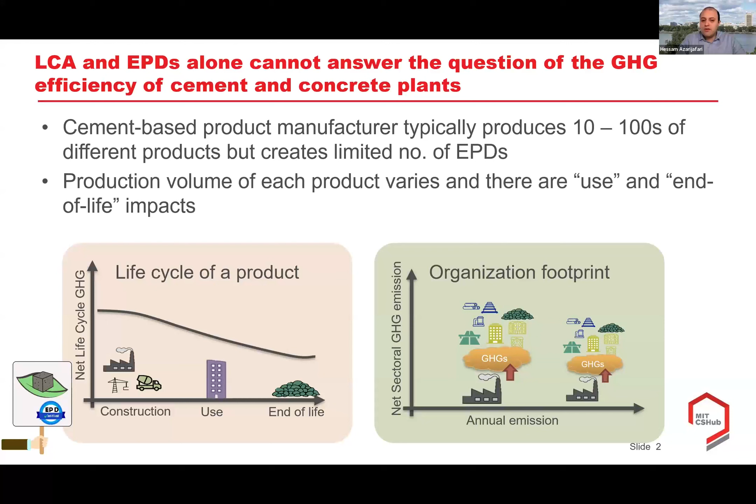So we need a more comprehensive framework to draw around the organizational footprint of a given facility that produces these materials.

But again, there are no clear guidelines on the rest of the emissions - the downstream emissions associated with use and end of life, as well as the upstream emissions associated with procurement of raw or intermediate materials for the cement plant.

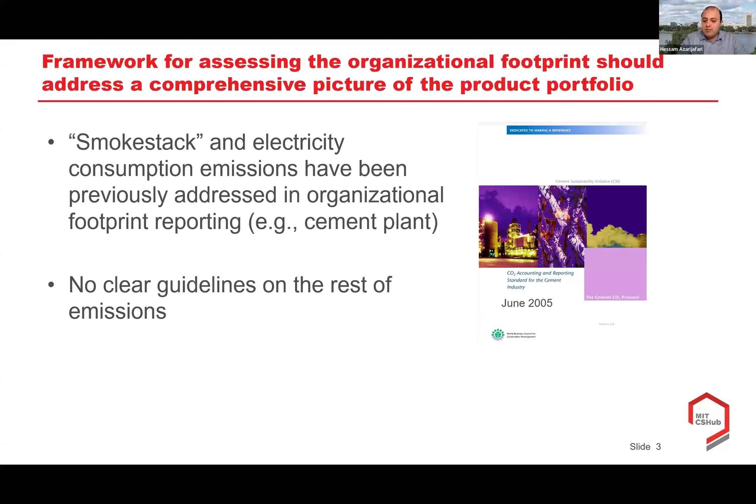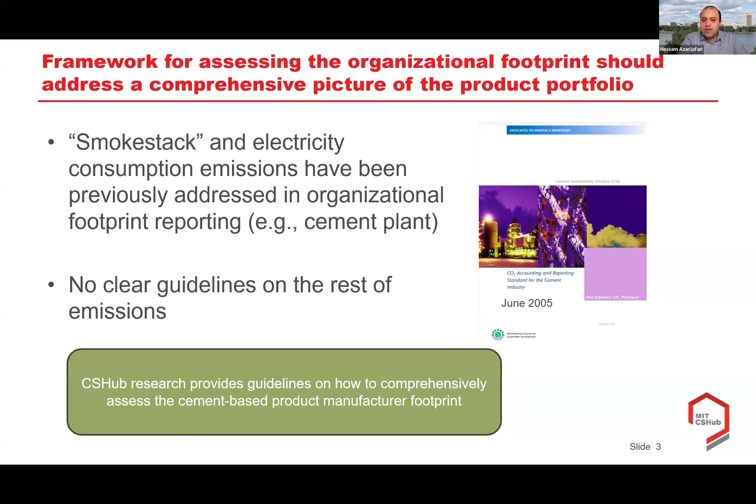Here, Bensu and Miao will provide guidelines on how to comprehensively assess the manufacturer footprint from an organizational perspective, accounting for all these important parts of product use as well.

The other part I wanted to emphasize is when we look at a facility looking to improve the performance of their product - producing a high performance product that gives a lower use phase impact - and I'm emphasizing expanding the facility. With expansion of their market and producing more of these materials, their footprint will go up.

But in reality, using these more efficient products results in a lower use phase or end use impact. If we want to show that, we'll see it doesn't show up in the scope 1, 2, 3 emissions. So there's a negative point here for the factory.

For example, the tire industry has already come up with guidelines on how to quantify the excess fuel emissions associated with tire performance during its use period.

But we'll see that if we only look at the limited scope of GHG reporting currently existing in the literature, we only have raw material procurement and manufacturing emissions. Perhaps distribution was added if downstream processes were included, but the use and the benefits provided to the user as a result of expanding the high performance product was generally neglected.

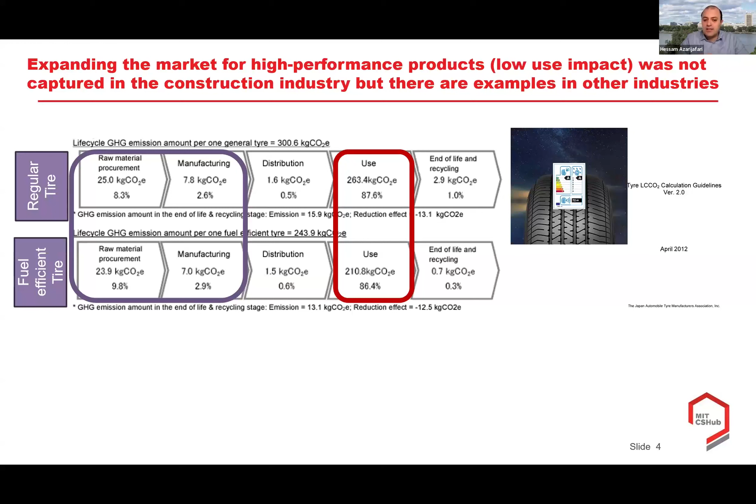Here we will show you how we can estimate the environmental benefits that an organization, for example a cement or concrete facility, can bring by producing a more efficient product in different end-use applications. So I'm going to stop here.

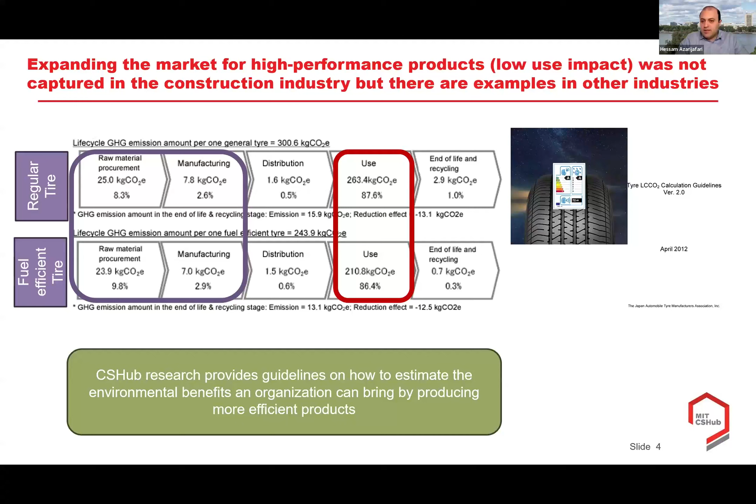Since we got a clarifying question about what an EPD is, let me explain: an EPD is usually a document that includes production, transportation, and installation emissions associated with a product like cement or concrete. It's often defined as including all life cycle emissions, but it's usually limited to the A1-A3 emissions.

As Hessam mentioned, my name is Bensu, and my colleague Miao Zhang and I are going to talk about opportunities for building and pavement life cycle assessment to inform cement scope 1, 2, 3 and avoided emissions reporting. If you guys need any further explanation about anything on the slides, feel free to add that into the Q&A, and I'll make sure to address it during my presentation.

This webinar will include two parts. In part one, I will first give an overview of cement's value chain, then present a map of building life cycle emissions and the portion of these emissions we've identified as reportable within cement greenhouse gas accounting and reporting. Then I will show a case study of scope 1, 2, 3 emissions in a US context.

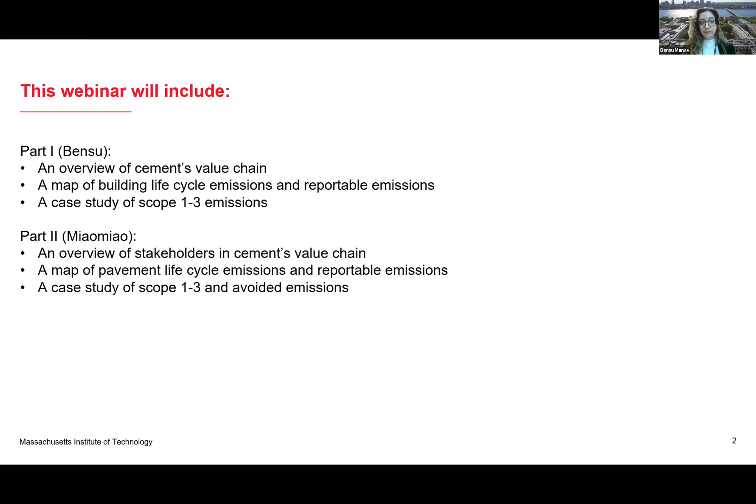I want to take a moment to talk about what we do at the Concrete Sustainability Hub. Our research is broadly collected under three main themes: carbon neutrality, infrastructure, and resilience. Details about our research, briefs, and papers can all be found on our website, cshub.mit.edu. The work we'll talk about today combines research from all three of these themes.

The part I'll present on building life cycle assessment includes work found under our resilience and carbon neutrality themes. Resilience ties into this because it involves characterizing the building stock to estimate expected damages, and we've used that building stock modeling in scaling up our life cycle assessment and carbon reporting.

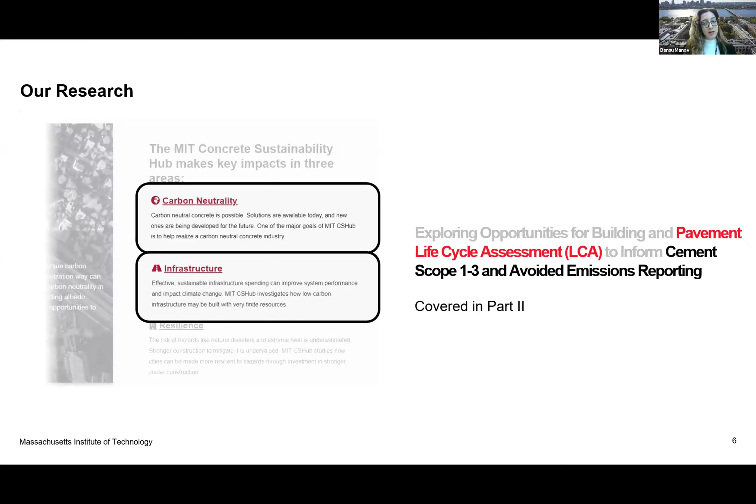The section on pavement life cycle assessment, in turn, could be found under our infrastructure and carbon neutrality themes, which Miao will cover in part two. So let's dive into it.

What's missing in the literature relating to carbon accounting or greenhouse gas accounting? Present protocols available for GHG reporting currently lack clear guidelines for material sectors, and specifically producers of intermediate products. I will be talking about GHG protocols, but first let's talk about the cement's value chain.

The cement's value chain has three scopes: scope 1, 2, and 3. And scope 3, in turn, is divided into upstream and downstream portions.

Scope 1 comprises direct emissions, so emissions related to cement production, since we're talking about cement's value chain. What determines the amount of emissions in this scope is the energy intensity of cement production.

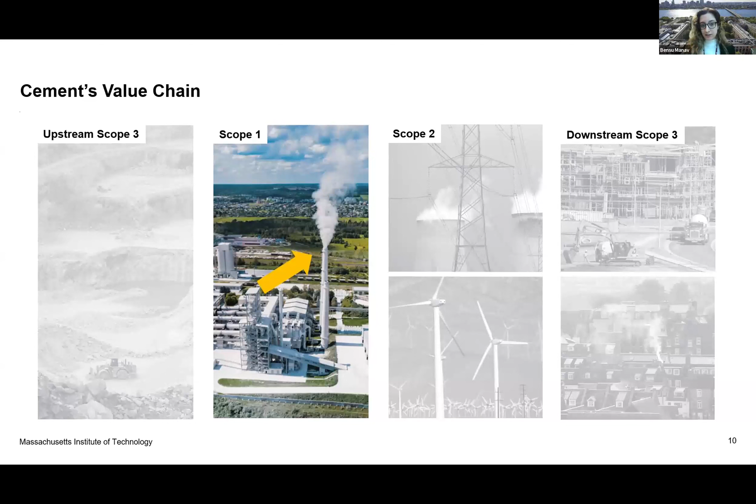Scope 2 includes emissions associated with the generation of purchased electricity — fuels burned for the production of electricity, which are used in Scope 1. This depends on the local composition of energy resources, so an area with lower carbon or renewable energy resources will have lower Scope 2 emissions.

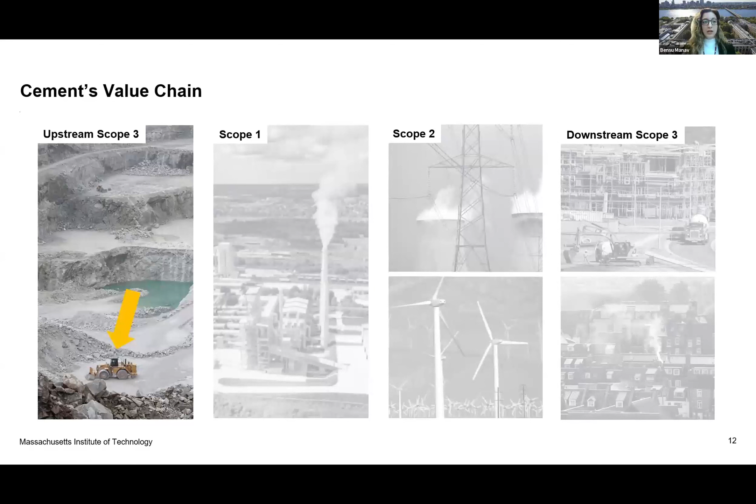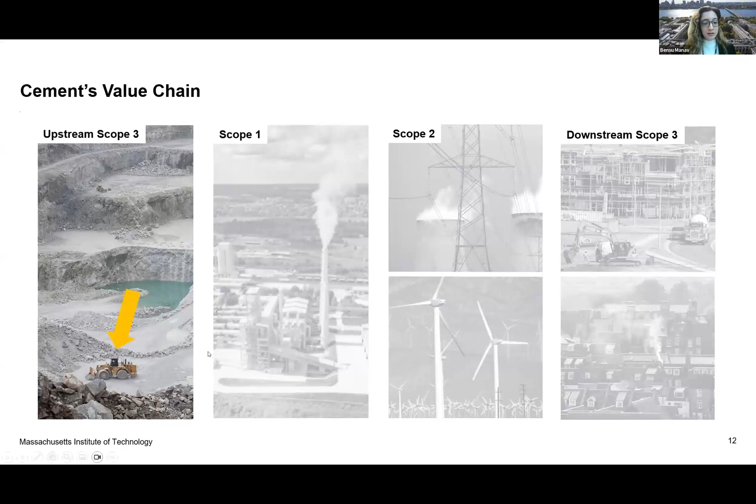Scope 3 includes all other emissions within the cement value chain, including upstream emissions associated with the extraction and production of raw materials such as limestone, as well as downstream emissions associated with activities like transporting cement or cement-based products to the construction site, the construction of the building, and the installation of these products into the building or end-use application, as well as the use and end of life of the final products, which are buildings and pavements.

These emissions include, in pavements, the fuel consumption of cars, and in buildings, the energy consumption of occupants in these buildings.

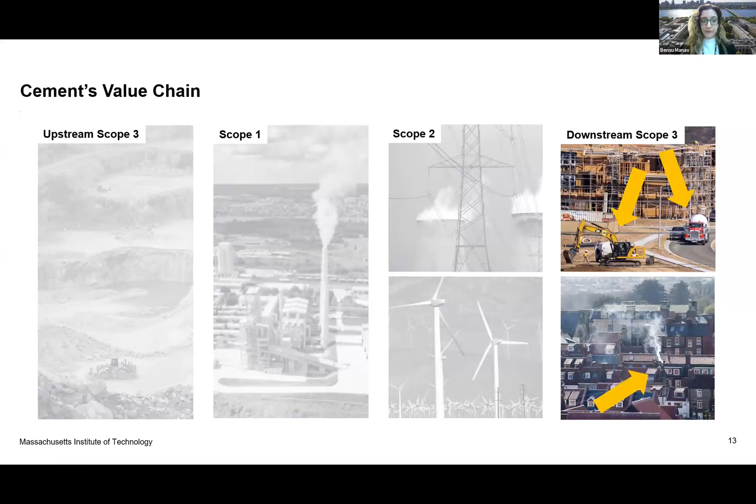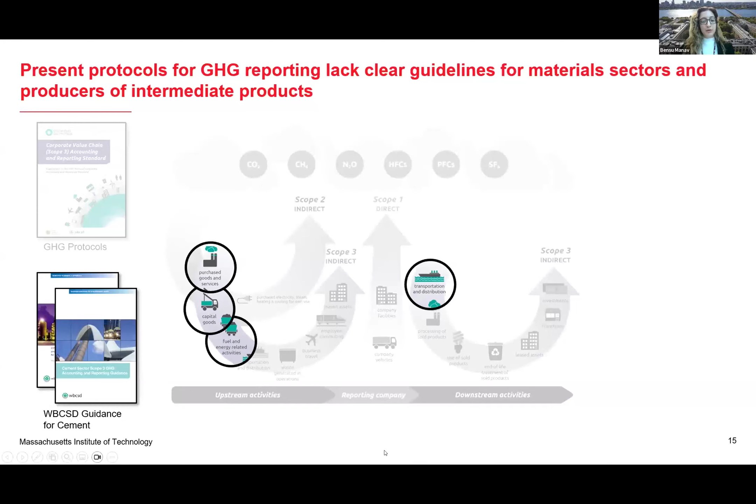The GHG protocols include definitions for Scope 1, Scope 2, and all the categories I mentioned for upstream and downstream Scope 3, as well as more categories on top of that. But guidance produced specifically for cement, such as WBCSD guidance, only requires a select few of these emission categories to be reported on. Those specifically are emissions related to the production of purchased goods and services, the production of capital goods, fuel and energy related activities, and downstream transportation and distribution of cement-based products.

All the other categories are deemed optional on the basis of cement being an intermediate product, or these categories being irrelevant, relating specifically to items like leased assets or franchises. The ones eliminated on the basis of cement being an intermediate product include emission categories like the use and end of life of sold products.

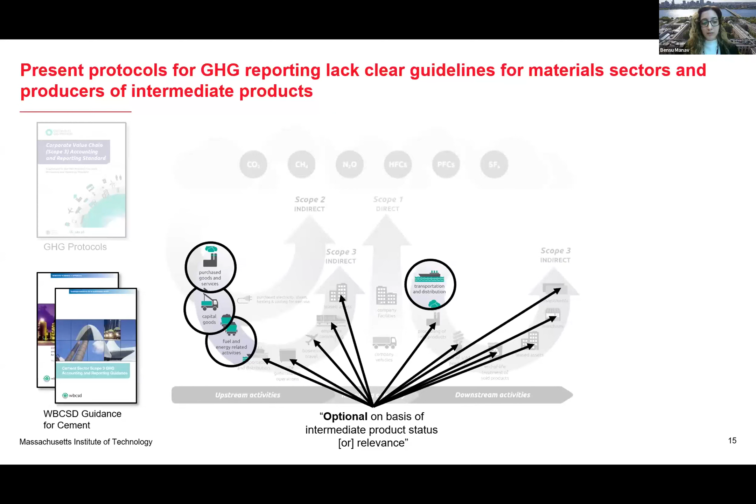That's relating to the claim in this guidance that it's too difficult and too complex to measure or even model these emission categories. Despite the fact that when we look into the details of examples of emissions which could be reported on, for the use and end of life of sold products, for instance the use of sold products is deemed optional and it includes the indirect use phase emissions of sold products over their expected lifetime, including the indirect consumption of energy such as fuels and electricity. As an example, they give emissions arising from the use of buildings and roads. So this guidance itself acknowledges that the end product of cement producers is buildings and roads, not just cement.

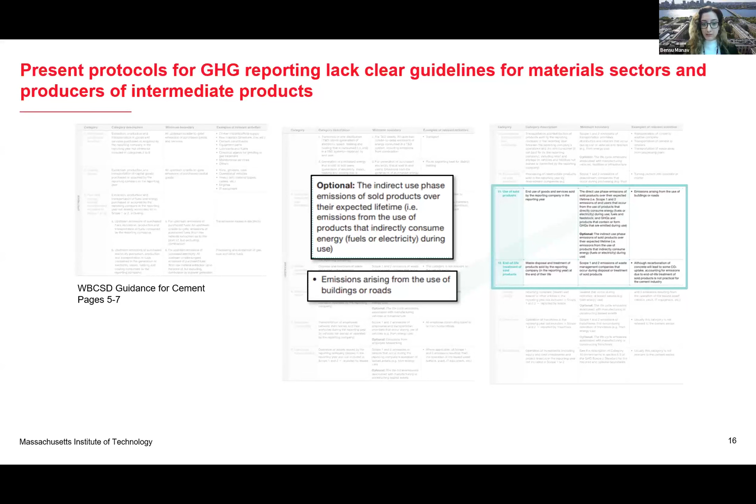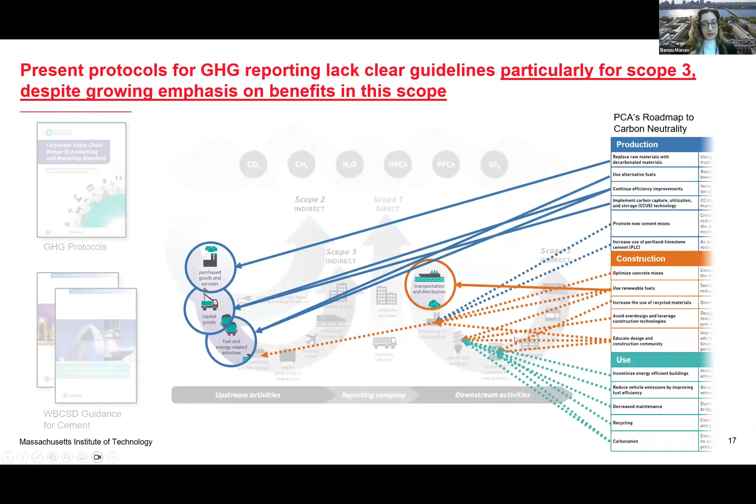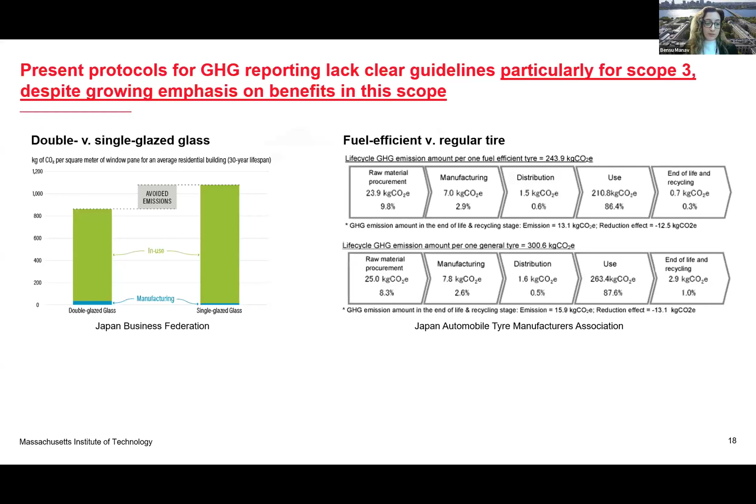And as Hassam mentioned, with the two examples of double versus single glazed glass, as well as fuel efficient versus regular tires, we're seeing industries actually reporting on Scope 3 emissions, because when producing these more efficient products, we may see increased Scope 1, 2, or upstream Scope 3 emissions. But then we see net benefits in reduced downstream Scope 3 emissions, as overall these products lead to reduced societal emissions.

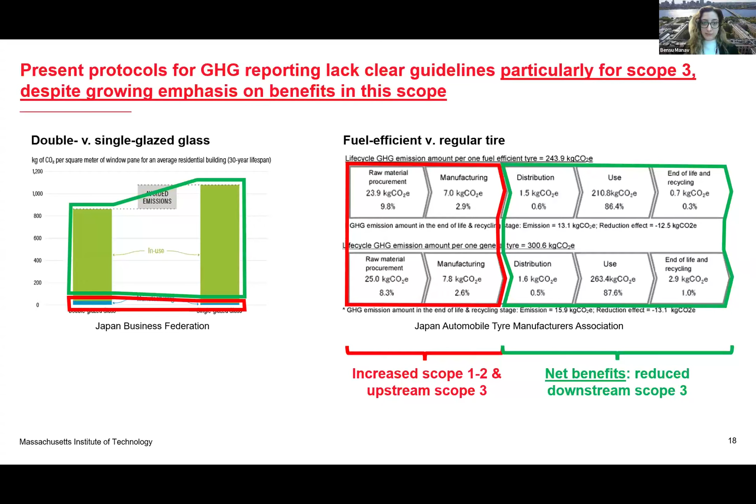Let's talk about what we found in our case study of Scope 1, 2, 3 emissions. The case study I'll be presenting today is on Miami, located in Southeast Florida in the United States. Specifically, I'll be talking about our modeling of single-family homes and how that could be mapped onto cement Scope 1, 2, 3. The building stock could be represented as a combination of different building archetypes, and the building archetypes for single-family homes include concrete, masonry, and wood archetypes.

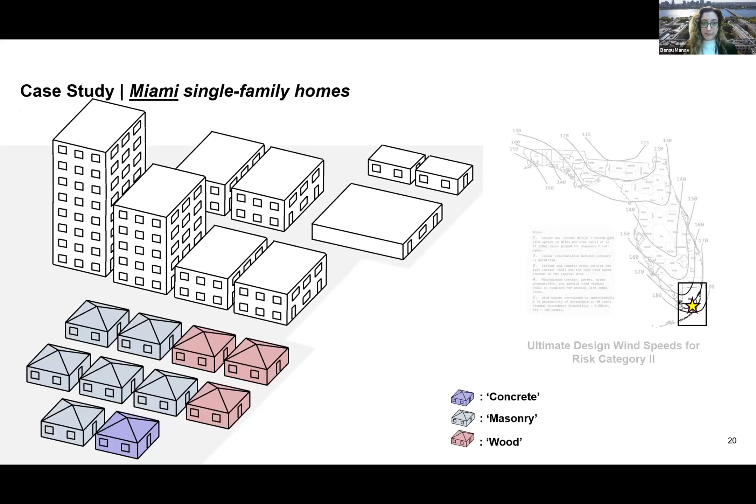Let's talk about building life cycle results that we could get from analyzing a single year of added building stock as a combination of these three options.

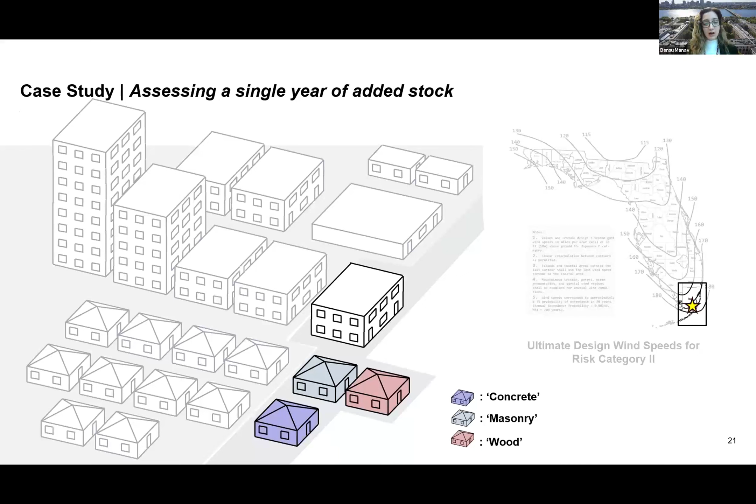Oftentimes when we look at studies of building emissions, most of these studies include emissions associated with producing materials, transporting them to the construction site, and installing them during the building construction. These are emissions that fall under the embodied category.

In our study, we've expanded the embodied emissions to include not just the initial construction phase, but also the production, transportation, and installation emissions associated with repair and replacement, where replacement relates to regular wear and tear, and repair relates to major repairs after, for instance, natural hazard damages, as well as the end of life of all of these products. Our study also includes an operational component, comprised of the energy usage for buildings. So here, I would like to tie into our first interactive question, which, Andrew, could you please pull up?

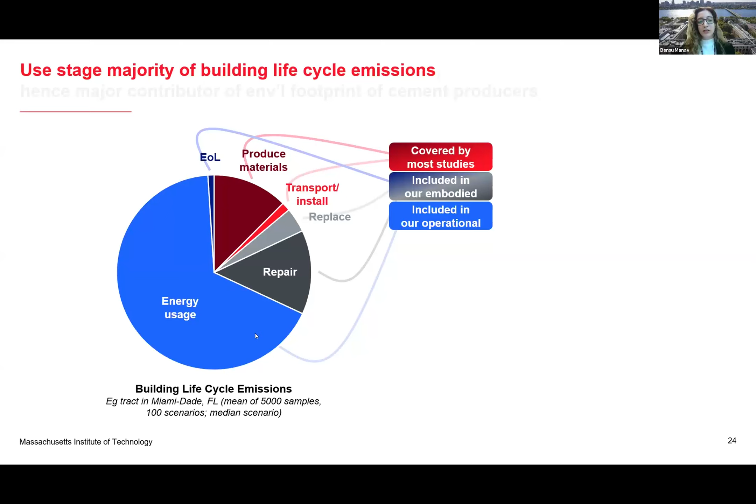So the question is, which of these building-related emissions that we see on the slide are relevant to a cement producer's environmental footprint? I want you guys to select all that apply, regardless of whether it's a portion or the entirety of the listed activity, regardless of whether we're reporting on all of building energy usage or only a select portion of that. I'll give you a couple minutes to think about and answer.

Yeah, no, that was interesting. Thanks very much, Bensu. Especially this pie chart, when I look at this and I see the materials production contribution to total life cycle GHG emissions is as large as the repair GHG emissions.

Almost three-quarters of the total emission goes to the energy usage. I just want to hear your thoughts and insight about how do you think these proportions vary when we change the context from one location to another, or one country to another?

Oh yeah, definitely. So going from one location to another, this could change the composition of materials used in our buildings. For instance, lower carbon materials and lower carbon building design will lead to a lower portion of this dark red section.

In areas less exposed to wear and tear damages, the replacement could be lower; less exposed to hazard damages, or a different type of hazard damages, could lead to higher or lower repair portion. And using materials with higher thermal resistivity in the building envelope could lead to a lower portion of energy usage.

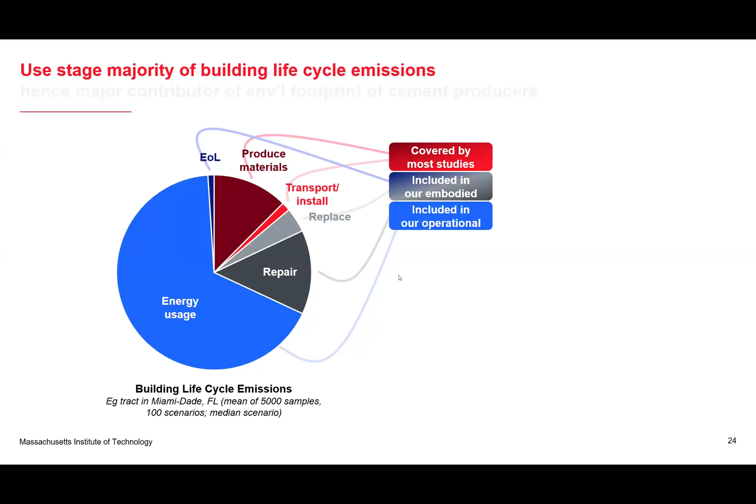Moving on to how these life cycle emissions relate to the environmental footprint of cement producers. As the question implied, we do believe that a portion of each of these life cycle stages is relevant to cement scope 1, 2, 3. That includes the production, transportation, installation of cement-based products, either used in the initial construction or repair and replacement activities, as well as the end of life of these products.

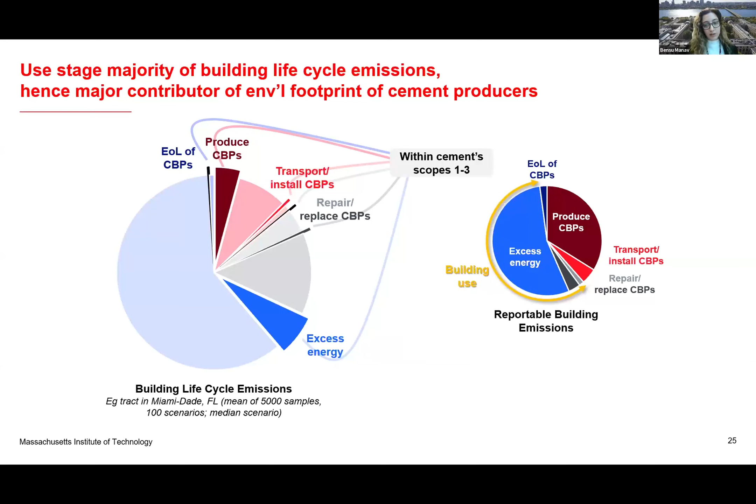And we attribute a portion of the building energy consumption, which we've called the excess energy, and I will define that in a second, also to cement scope 1, 2, 3. And if you take these slices and put them together into its own pie chart, then we can see that emissions related with the building use comprise a large portion of what we're identifying as reportable building emissions, which can be computed with building life cycle assessment.

Let's talk about excess energy. In the definition of excess energy, we wanted to hit all principles of greenhouse gas reporting. So we wanted to make sure that we accounted for building energy for completeness, that we apportioned it for cement-based products to keep things consistent because that's what we're reporting on. We wanted to identify the portion that's relevant, so not all of the energy usage we think is relevant to report.

Specifically, the heating and cooling could be impacted by the cement-based products used in the building facade or exterior wall core, but the energy consumption associated with, for instance, lighting and appliances will not be affected by cement-based products, so that falls outside. And we're proposing a science-based metric to achieve this attribution or apportionment.

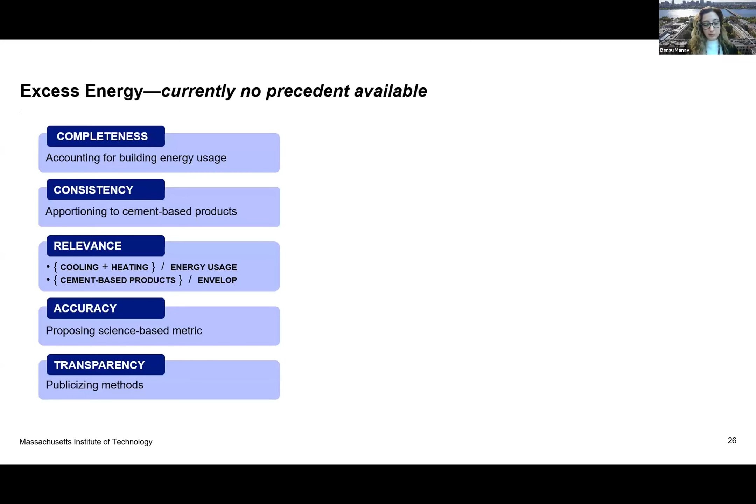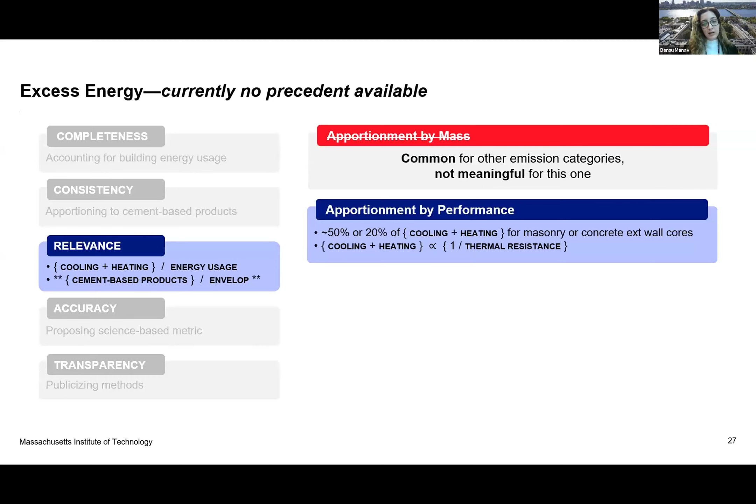Two methods that we've considered. First, we considered doing it by mass. And although this is common for other emission categories, it's not meaningful for this one because the density or mass of products used in the building exterior wall core don't necessarily correlate with the thermal resistivity of these materials. So we decided to apportion heating and cooling emissions by a performance metric.

So thermal resistivity has a relationship for systems in parallel. For instance, windows, doors, and the exterior wall system all contribute to the thermal resistivity of the structure, and they're found in parallel, as in the same plane with each other.

The exterior wall finishing, core, and interior are systems that are in series. So we needed to consider both systems to attribute heating and cooling emissions to the exterior wall core where cement-based products could be found. This is also the amount that would be reported for a building with a wood exterior wall core, which would be 0 because there wouldn't be cement-based products in the wall core.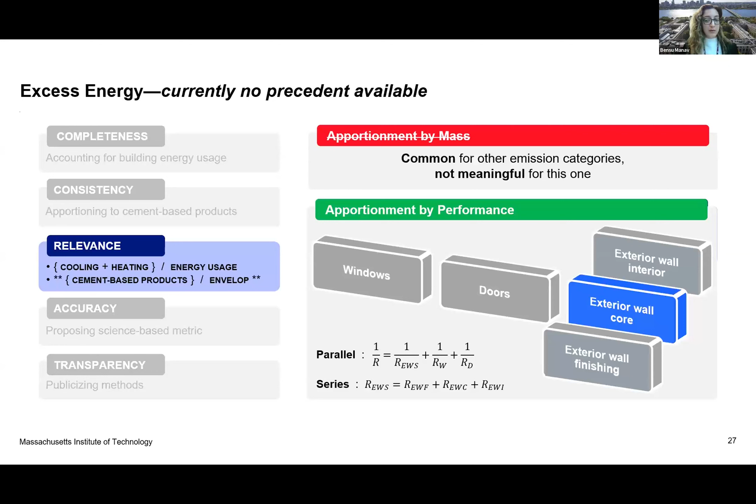Building life cycle emissions include the product, construction, use, and end-of-life emissions, which we just talked about in the pie chart. It also includes negative emissions, such as carbon uptake, which occur during the building use and end-of-life phases. And as I just mentioned, all of these, or at least a portion of each of these building life cycle stages are relevant to report in the environmental footprint of cement producers.

For instance, the production of cement for initial construction, repair, and replacement maps onto scope 1 and 2. The production of raw materials used for the production of cement maps onto upstream scope 3. And anything that happens after the production of cement, such as processing cement into cement-based products, transporting, installing, and the end of life of these cement-based products, as well as excess energy and carbon uptake, maps onto downstream scope 3.

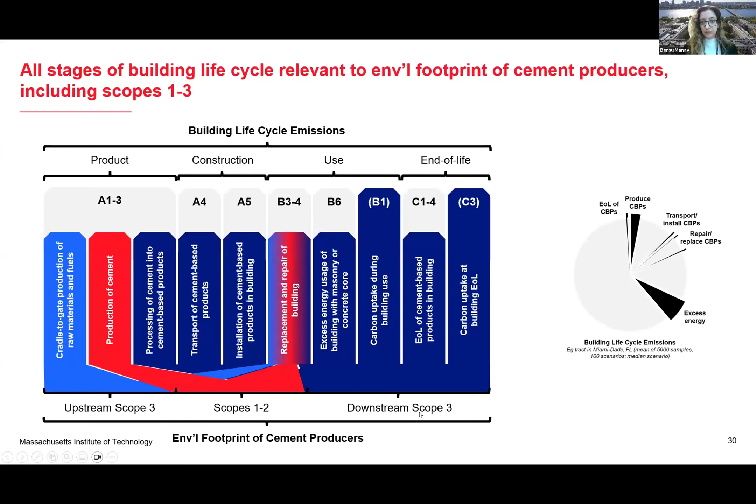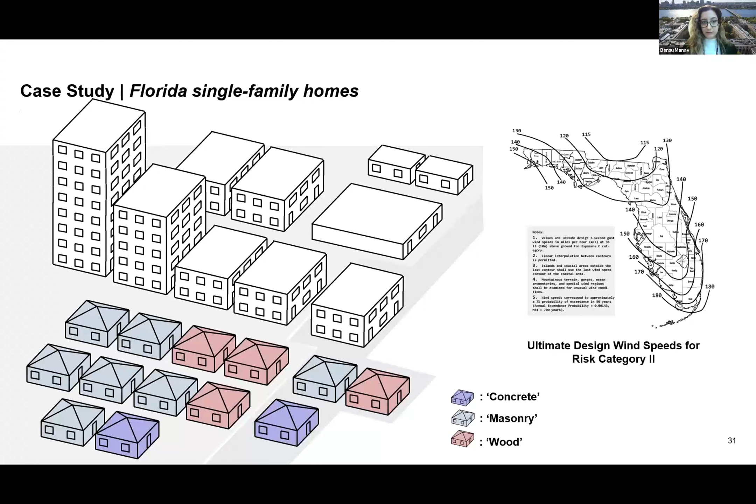So going back to our case study of single-family homes in Florida. With information about market share, we can model how reportable emissions evolved over time. Our study started from 1940, which is the first date that we have a complete set of information for, through 2022. As you can see, with scope 1, 2, and upstream scope 3 emissions, these more or less follow the pattern of cement consumption over the years, where it's going up over time and then taking a dip around the 2008 economic crisis.

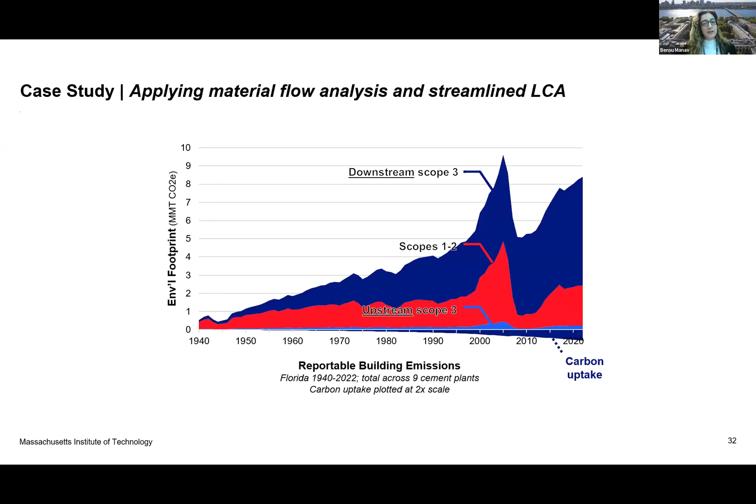But then with downstream scope 3, again, it's following a similar trend, in that it goes up and then it goes back down, because we also have these installation and construction emissions in downstream scope 3. But we also see it's kind of like a cone and it's growing over time because we have more buildings contributing to the energy consumption emissions and more buildings reaching their end of life and contributing to end of life emissions.

If we take only buildings built in 1940 and look at this relation cumulatively, then we can look at how the different emission categories add up together over our analysis period.

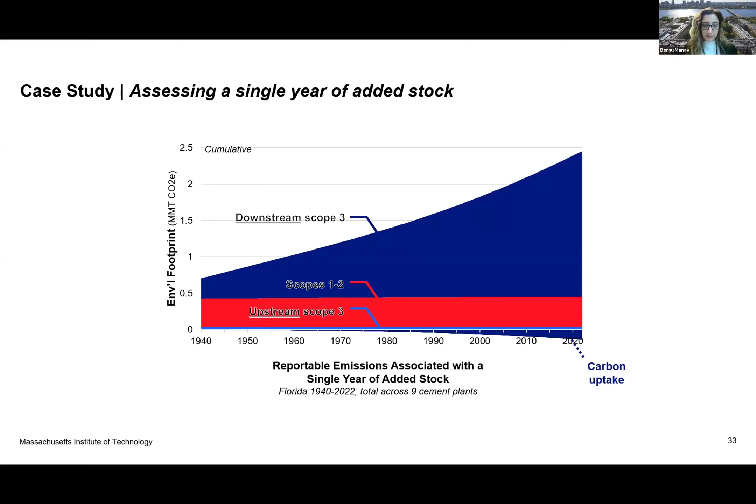So towards the end of the analysis period, scope 1 and 2 comprise 26% of what we've identified as reportable emissions. This includes the calcination and combustion of raw materials, the combustion of fuels on site, as well as the combustion of fuels for purchased electricity, which map onto scope 1 and 2. In the current guidance for cement reporting, all of these categories are deemed required.

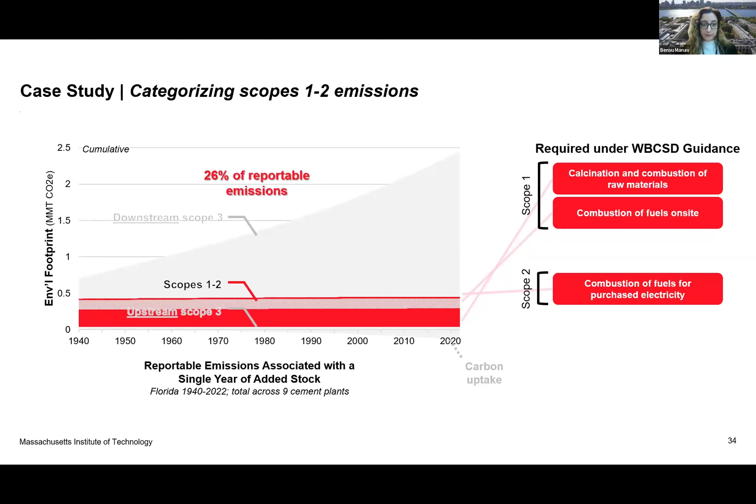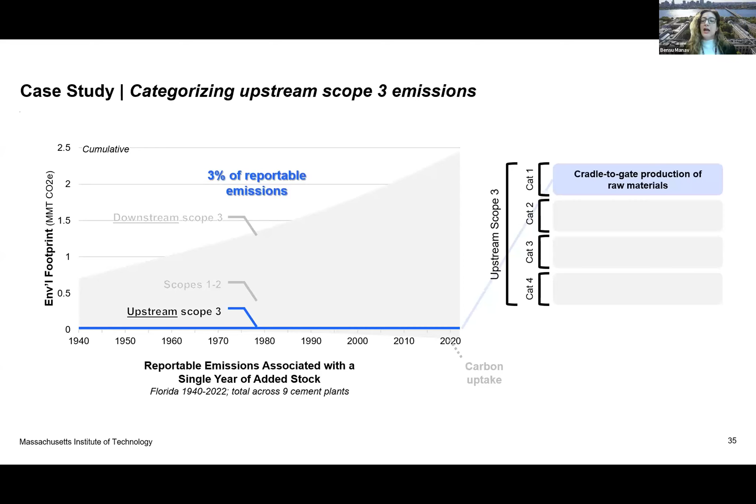Upstream scope 3 comprises 3% of reportable emissions towards the end of the analysis period. This includes cradle to gate production of raw materials, capital goods, and fuels that are burned either in scope 1 or 2, as well as the transportation of these raw materials, capital goods, and fuels to the location where they're consumed. Again, most of these categories are required under the WBCSD guidance.

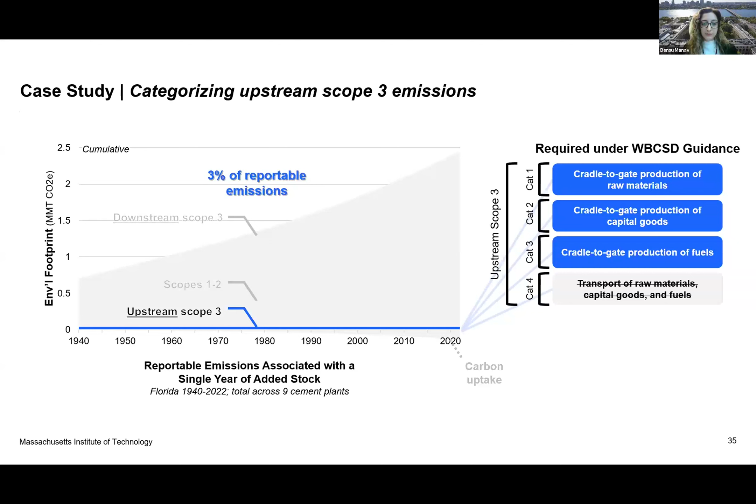And then downstream scope 3 comprises 71% of reportable emissions towards the end of the analysis period. This includes processing cement into cement-based products, transporting these products, installing them during building construction, as well as the excess energy use of buildings with masonry or concrete cores, and the end of life of cement-based products. Here you can see that a large portion of this comes from excess energy, and a similar yet smaller portion comes from the end of life of buildings.

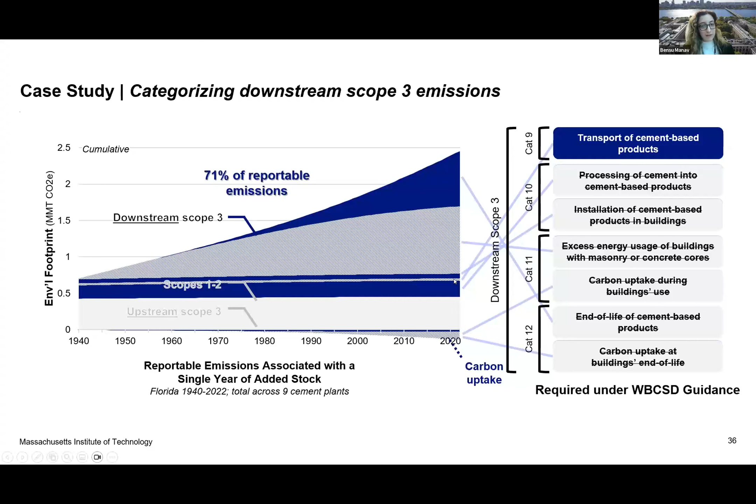As well as on the negative side, there's also carbon uptake during the building use and carbon uptake at building end of life. So scope 3 not only comprises a large portion of what we're identifying as reportable emissions, it also spans a large variety of different emission categories. But then only one of these emission categories is required under the WBCSD guidance, and that's the transport of cement-based products. And that's actually the tiny sliver of emissions that are in this scope.

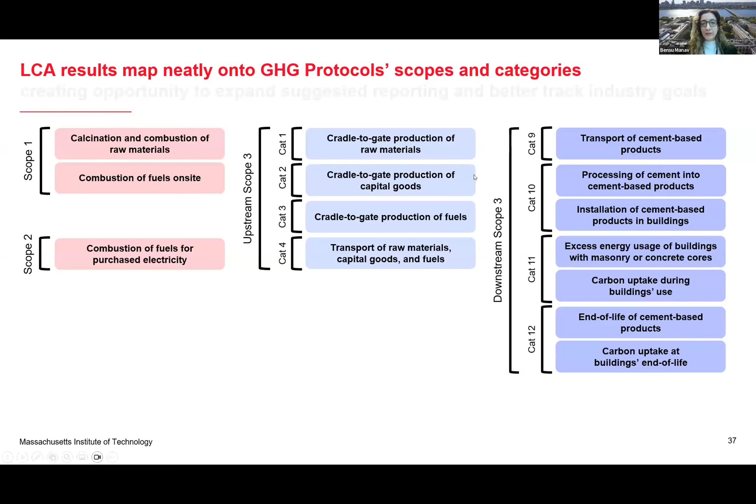Not only can life cycle analysis results be manipulated to map neatly onto the greenhouse gas protocol's emission scopes and categories and capture a wider range of emissions than is currently required, it creates opportunity to expand this suggested or required reporting to better track industry goals, which relate to a lot of these downstream impacts, such as the use and end of life of buildings and pavements.

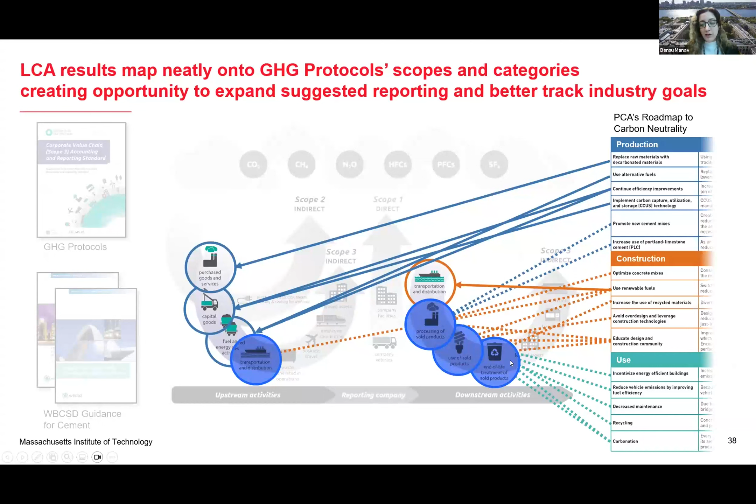Our main contributions in this field, apart from mapping life cycle assessment onto greenhouse gas reporting, has been calculating the repair and replacement emissions of buildings so that we're accounting for embodied impacts in the use phase, not just initial construction, defining excess energy as there hasn't been a precedent for this in the building or construction materials sectors, and calculating carbon uptake during use and end of life.

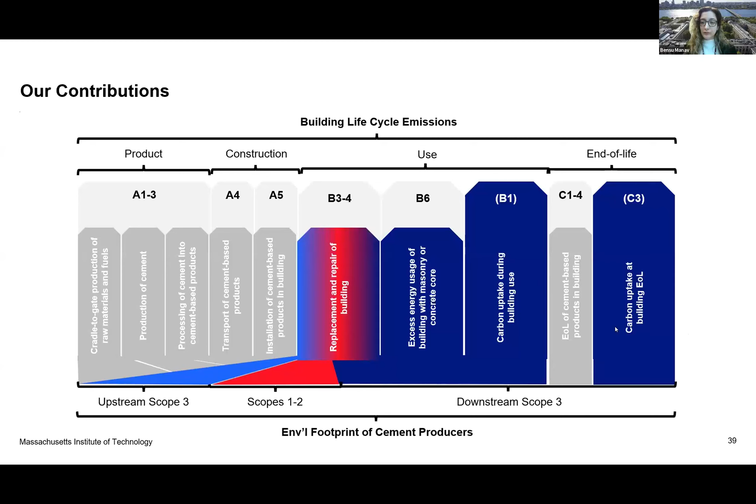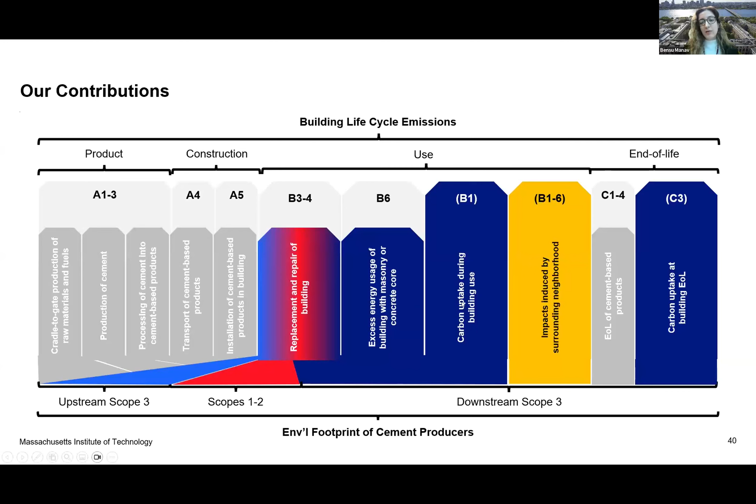As well as accounting for impacts induced by the surrounding neighborhood, which could affect the amount of repair and replacement, excess energy, or carbon uptake. So that kind of affects all of these other categories. And we have ongoing research on each of these contributions. They're actually separate papers or fields of research that we have going on.

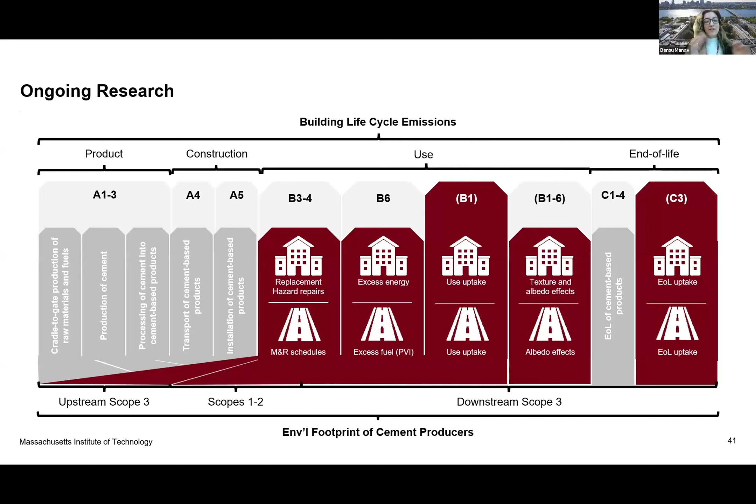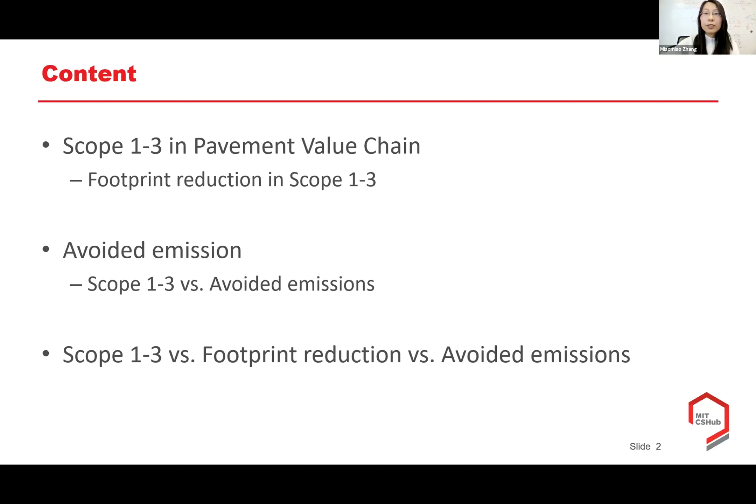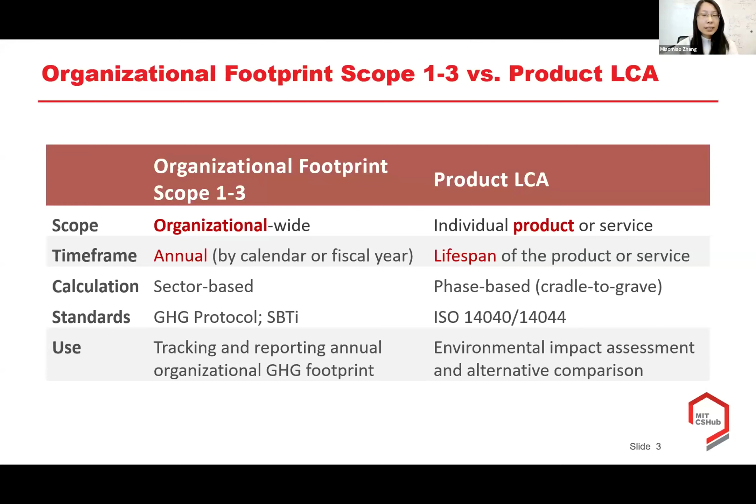So at first, let's make a simple comparison between scope 1, 2, 3 and product LCA. Scope 1, 2, 3 focus on the organizational footprint, while LCA is individual product or service specific. Scope 1, 2, 3 accounting is sector-based and reported annually. But for product LCA, it evaluates the entire lifespan of the product or service, and it is a phase-based evaluation from cradle to grave. Therefore, scope 1, 2, 3 is used to track and report annual organizational GHG footprint, while product LCA is for environmental impact assessment and alternative comparison.

Let's get back to pavement. Pavement life cycle GHG emissions include multiple aspects from material acquisition, material production, construction, operational use phase, the maintenance and rehabilitation phase (MR), and end of life.

The use phase emissions include emissions from multiple aspects. First and most importantly, the PVI emissions, pavement-vehicle interaction emissions. It accounts for emissions from vehicle fuel consumption. The pavement performance, the pavement condition, can affect the PVI emissions. So compared to a smooth pavement surface, a rough pavement surface will require the vehicle to use more fuel to overcome the rolling resistance, leading to higher PVI emissions compared to the smooth pavement surface.

And fuel cycle emissions, which is cradle to gate emissions of fuel consumed by vehicles. We also reported fuel cycle emissions as operational emissions because they are directly proportional to the amount of fuel used and the PVI emissions. Albedo effect—the pavement surface color is also important. A light-colored pavement surface with higher albedo will reflect more solar radiation, and this effect is equivalent to the albedo emissions.

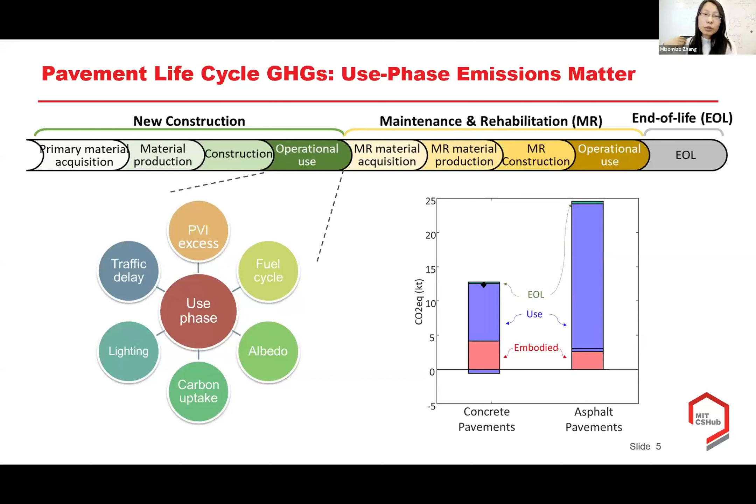So the use phase emissions are very important. In pavement life cycle GHG emissions accounting, we may find the use phase emissions are even higher than the embodied emissions. Use phase emissions are different for different pavement materials—in this figure, concrete pavements and asphalt pavements have different use phase emissions. So it's very important to account for use phase emissions in pavement life cycle GHG accounting.

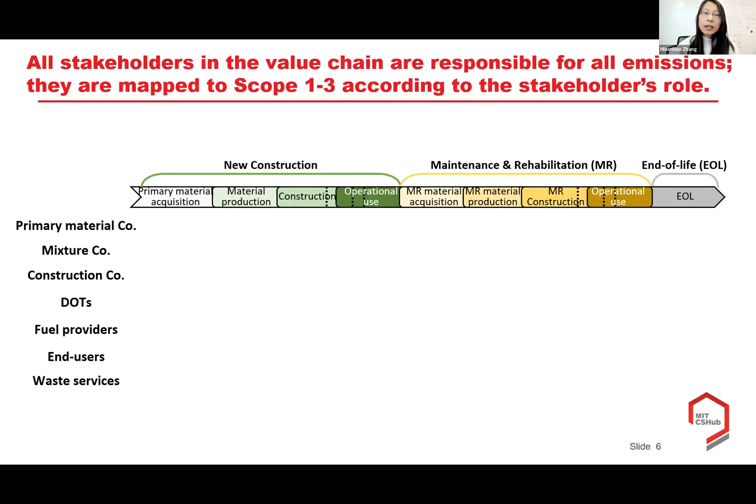So Benzu just discussed the definition of scope 1, 2, 3 for one specific company, the cement company, and I'll go deeper into the scope 1, 2, 3 definition for the entire pavement value chain. The pavement value chain involves stakeholders from primary material company, mixture company, construction company, DOT, fuel providers, end users, and waste services. Each of them will generate their own emissions as their scope 1 and 2, and all stakeholders in the value chain are responsible for all emissions.

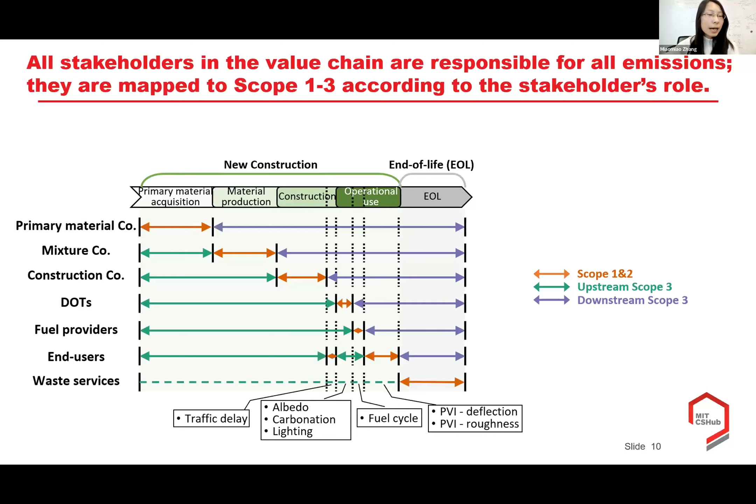For example, for primary material company, they generate emissions related to the material acquisition, and this part of emissions are their scope 1, 2, and the remaining are their scope 3 emissions. Mixture companies are directly responsible for emissions from material production, and construction companies are directly responsible for emissions from the construction phase, with the remaining as their scope 3. The same idea can be applied to all stakeholders.

This is a full mapping of scope 1, 2, 3 to different stakeholders. The maintenance and rehabilitation, the MR part, is a simple duplicate of the new construction part, because MR also includes process from material acquisition to construction to the use phase. All stakeholders in the value chain are responsible for all emissions, and they are mapped to scope 1, 2, 3 according to the stakeholders' roles and activities.

So here, Andrew will help us set up a poll activity here. This poll is about a question of pavement value chain scope 1, 2, 3. Considering your role in the pavement value chain, which of the following is the largest source of your emissions? Please consider your role in the pavement value chain and select the option that best reflects your stakeholder perspective.

Awesome, thanks very much, Miao. It's a very interesting figure showing that everyone is responsible for the life cycle emissions. Some of them directly have influence on the changes that we can make in order to reduce the scope 1 to 3 emissions, and in some part there is an indirect signal that we may need to communicate with our downstream users or upstream suppliers in order to reduce it.

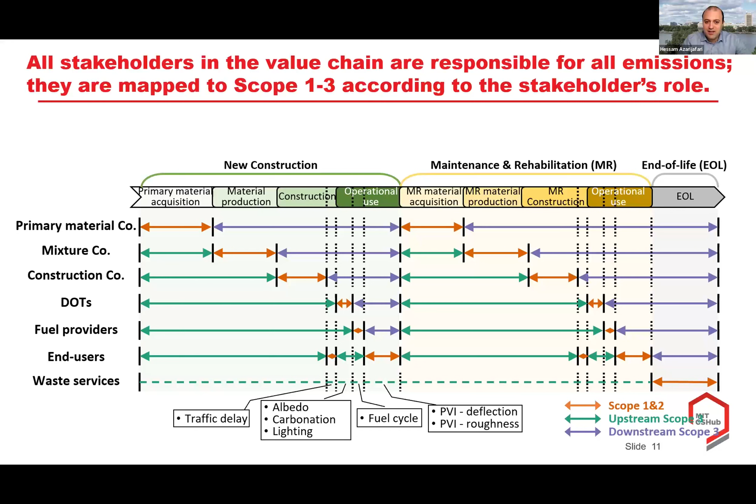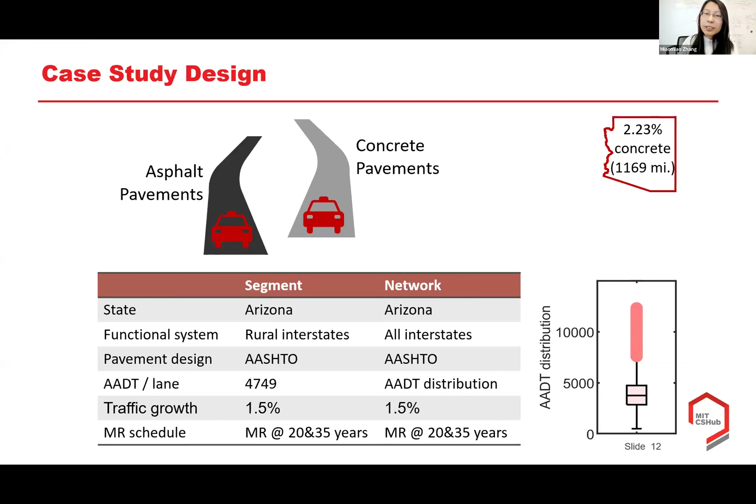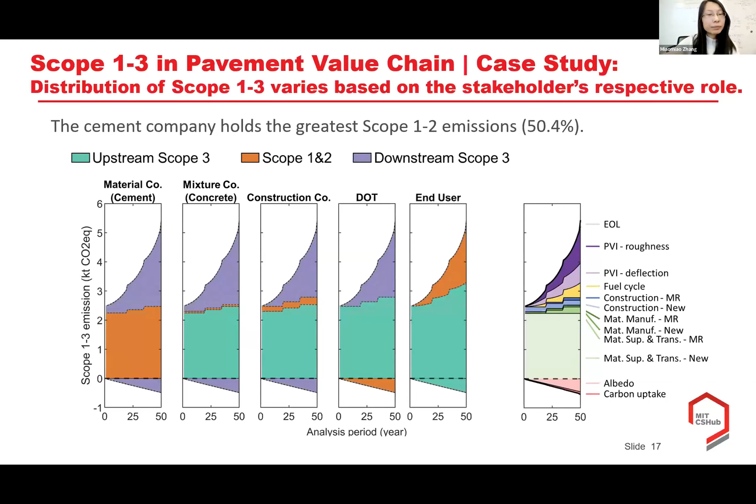Among all different stakeholders, the cement company holds the greatest scope 1 and 2 emissions, showing significant potential for footprint reduction in the raw material supply phase of concrete pavements. So for a company that improves its products to have lower GHG emissions, the company's scope 1, 2, 3 will decrease, and the emission reduction can be evaluated by this concept of footprint reduction.

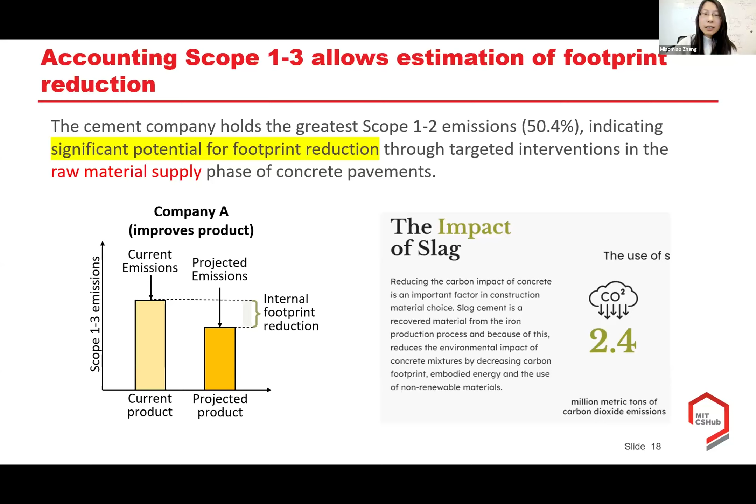It is reported that the use of slag can reduce concrete GHG emissions. So for a concrete company, if they use slag in their concrete production, their scope 1, 2, 3 will decrease because of the use of slag. For our case study in Arizona, currently there are about 20 miles of concrete pavements, and the scope 1, 2, 3 could decrease by 30 kiloton because of the use of slag, so the concrete footprint reduction is about 30 kiloton.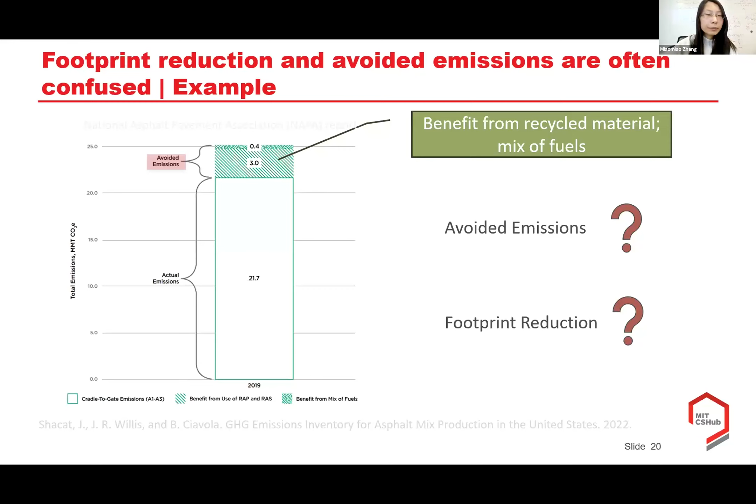I just discussed the concept of scope 1, 2, 3. This framework is used to know, report, and reduce footprint. It is very important, but incomplete. I will introduce another concept, avoided emissions, as a complement to the scope 1, 2, 3 framework, which can go beyond footprint reduction and emphasizes proactive efforts for positive environmental change.

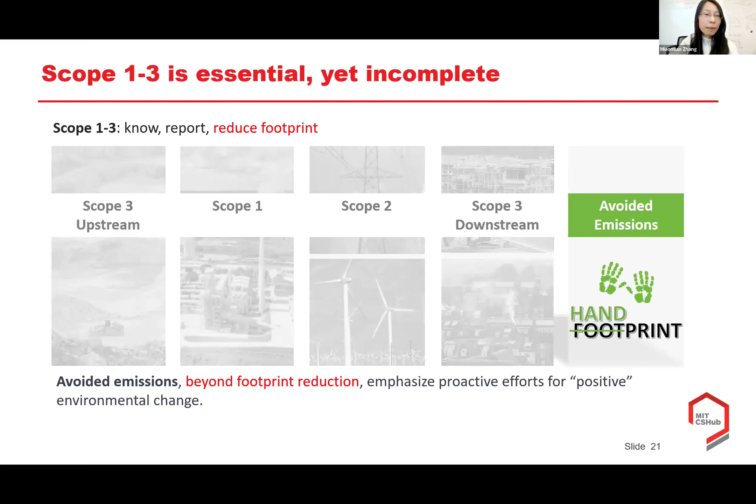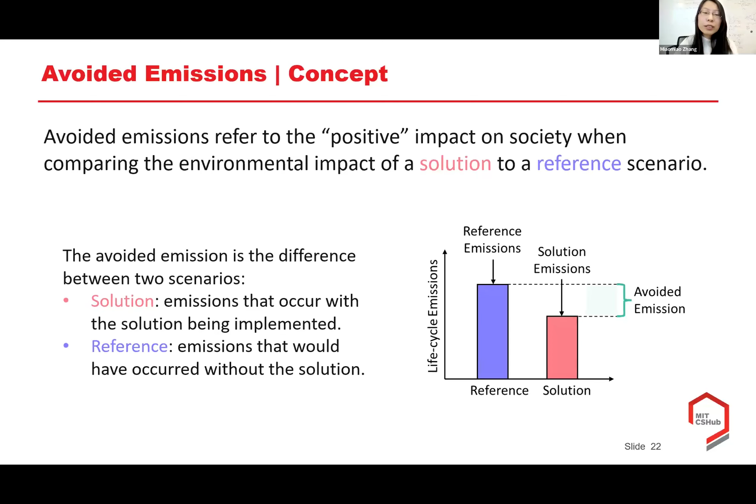Avoided emissions refer to the positive impact on society when comparing the environmental impact of a solution to a reference scenario. So avoided emission is the emission difference between two scenarios, the solution and the reference scenario. The solution emissions refer to emissions that occur with the solution being implemented, and the reference emissions refer to emissions that would have occurred without the solution.

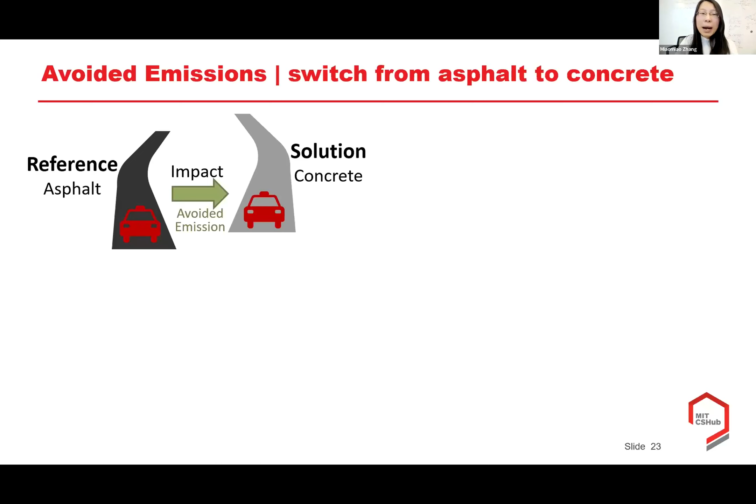So for our case study, if we assume concrete pavements as the solution and asphalt pavements as the reference, the positive impact of replacing asphalt pavements with concrete pavements can be evaluated by the concept of avoided emissions. Here is a case study of the avoided emissions from switching asphalt pavements to concrete pavements.

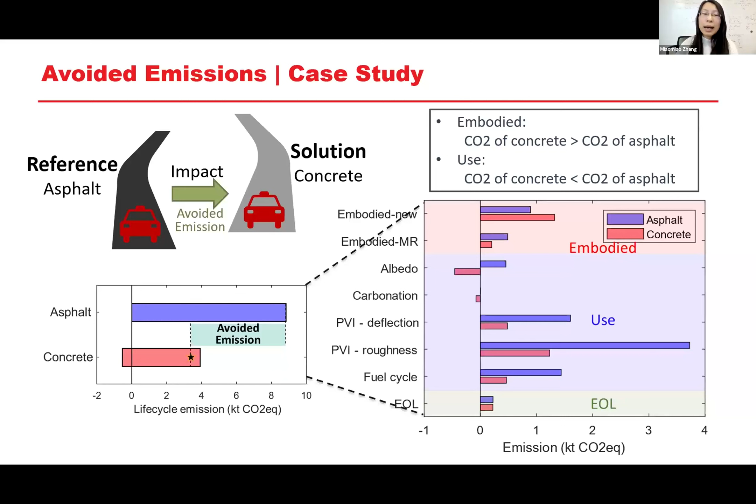Here is a comparison between the avoided emission concept and the scope 1, 2, 3 emissions, and why we need this avoided emissions concept to complement scope 1, 2, 3. For company A, who implements the low emission solution, if they expand the sale of the low emission products, the scope 1, 2, 3 of company A will increase because of the expanded market share.

Correspondingly, for company B, who is displaced by the solution, their scope 1, 2, 3 will decrease because of the contracted market share. If we combine company A and company B, we may find that the planetary emission is reduced, and the total emission reduction can be evaluated by the concept of avoided emission.

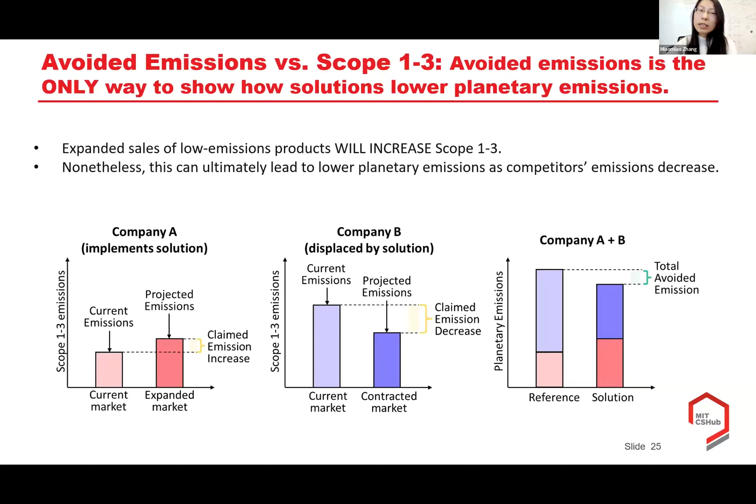So the expanded sales of low emission products will increase its scope 1, 2, 3, but it will ultimately lead to lower planetary emissions because competitors' emissions decrease. This emission reduction cannot be captured by scope 1, 2, 3 because company A's scope 1, 2, 3 increased. Avoided emission is the only way to show how solutions lower planetary emissions.

For our case study in Arizona, currently there are 2% concrete pavement. If we expand the concrete market share from 2% to 10%, the concrete scope 1, 2, 3 emissions will increase by about more than 200 kilotons.

Correspondingly, for asphalt pavement, their market share will be contracted from 98% to 90%, and asphalt scope 1, 2, 3 will decrease by about 700 kiloton. So if we combine the emissions of concrete and asphalt, the total emission reduction is about 432 kiloton, and this is the avoided emission of expanding concrete pavement from 2% to 10%.

The increase in the use of concrete pavements will increase its scope 1, 2, 3, but decrease the planetary emissions.

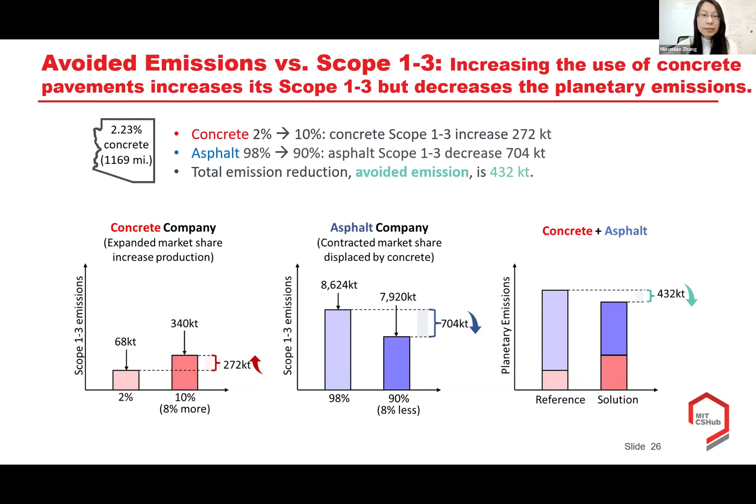So overall, in this presentation, I introduced two ways to reduce the planetary emissions. The first one is to reduce the concrete emissions by the use of slag in concrete production. The second one is to expand the concrete market share from 2% to 10%.

By combining these two methods, the concrete scope 1, 2, 3 increases, and the asphalt scope 1, 2, 3 decreases, and the planetary emission reduction is about 462 kiloton. For this 462 kiloton emission reduction, the two concepts of footprint reduction and avoided emissions are both involved.

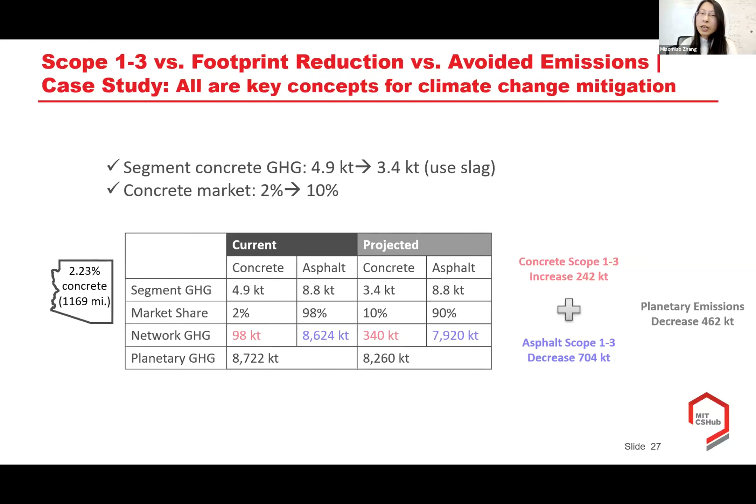How do we differentiate these two concepts, footprint reduction and avoided emission? Currently in Arizona, there are 2% concrete pavements. For these existing 2% concrete pavements, the concrete scope 1, 2, 3 reduction caused by the use of slag is classified as footprint reduction. On the other hand, for the new 8% concrete pavements from switching asphalt pavements to concrete pavements, the emission reduction is classified as avoided emissions.

Footprint reduction focuses on emissions reduction within the product value chain, so we use internal footprint reduction here. Avoided emissions involve emission reductions occurring outside of the value chain, and it is always related to market change. So footprint reduction can be captured by the scope 1, 2, 3 concept, while avoided emissions cannot be captured by scope 1, 2, 3.

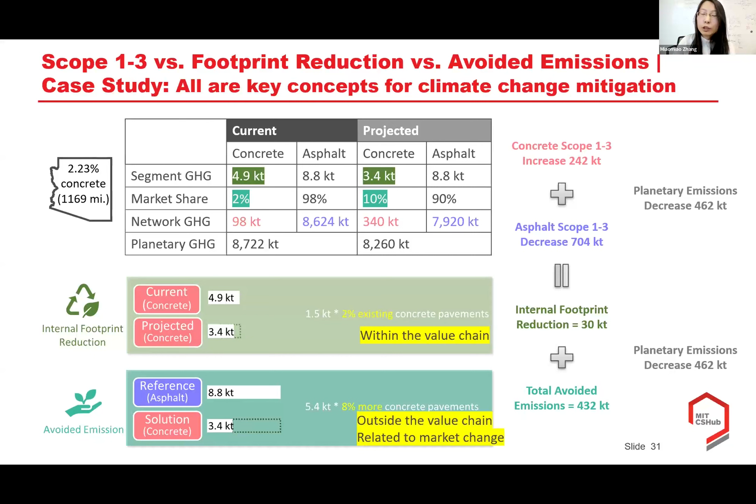That's why we need this new concept, the avoided emission concept, to show the benefit from alternative products and market change. Both internal footprint reduction and avoided emissions are key concepts for climate change mitigation. By implementing both approaches, organizations can effectively contribute to planetary emission reduction.

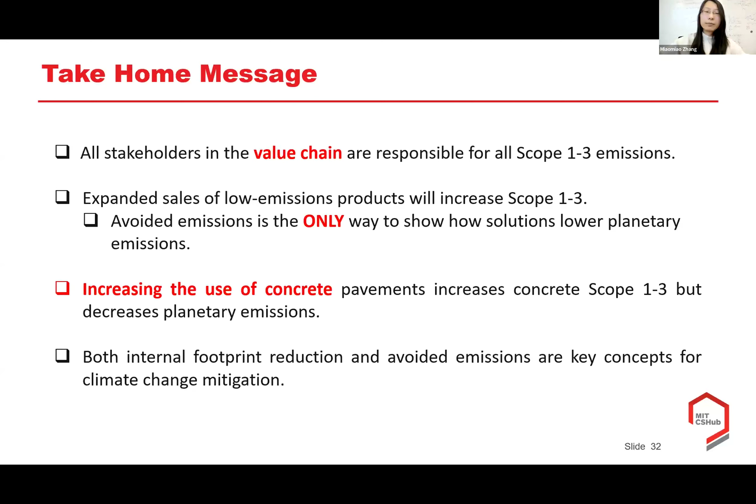In conclusion, avoided emissions is the only way to show how solutions lower the planetary emissions, and both internal footprint reduction and avoided emissions are key concepts for climate change mitigation. That's it, that's my part of the presentation. Thanks all for listening.

Thanks very much for this great presentation. I think now we can see how we can harness the power of LCA and calculate the amount of organizational footprints associated with two main end-use applications of cement-based products.

Thanks very much everyone for posing your questions in the chat box. We may not be able to respond to all of them, but I'm trying to bundle some of the relevant questions together and ask them of our presenters. First question: how did you calculate the CO2 uptake during the use and end of life? Could you comment on that please?

I guess either of us can answer this question, but we have extensive work on modeling the surface area and volume of cement-based products used in buildings and pavements. We have a conference paper out there, and soon our journal paper will be out too, but on the CSHub website, which I could share in the chat, we have a calculator tool which helps estimate the CO2 uptake over the use and end of life, defining things like the lifespan, the end of life period, the stockpiling geometry, as well as the cement composition and other factors like compressive strength.